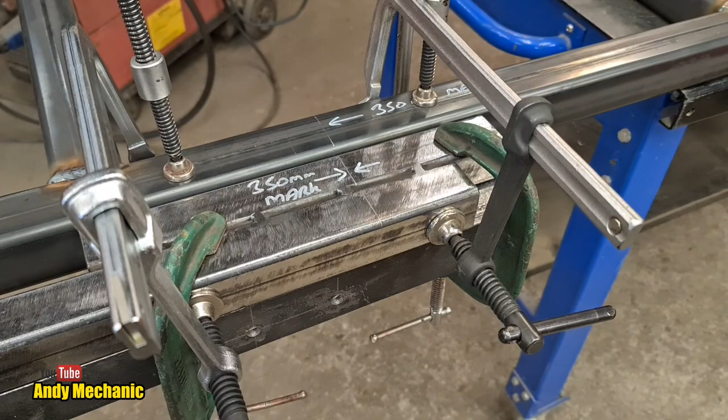These 2 pieces are welded together. We needed a bit of clearance as we come down here - look, you see, we needed a bit of clearance for the foot. So a couple of bits of box section welded together, all clamped up nice and tight.

And that now, and I'm not kidding, making this piece exactly 90 degrees to this piece of box section in 2 planes, that way and that way, was an absolute nightmare. Because obviously when you weld something it distorts with the heat, and every time I welded down here on this one, it pulled that down.

So I had to, in the end, cut a groove in it and put a very thin line of weld down there, and what that did is it pulled the whole thing back up. It wasn't bent for the first few centimeters, and then it seemed to kink downwards a bit. So by putting a weld there, it brought the whole thing up perfectly, and it's nice and straight. I know why it bent - it bent because of the heat. But anyway, not to worry.

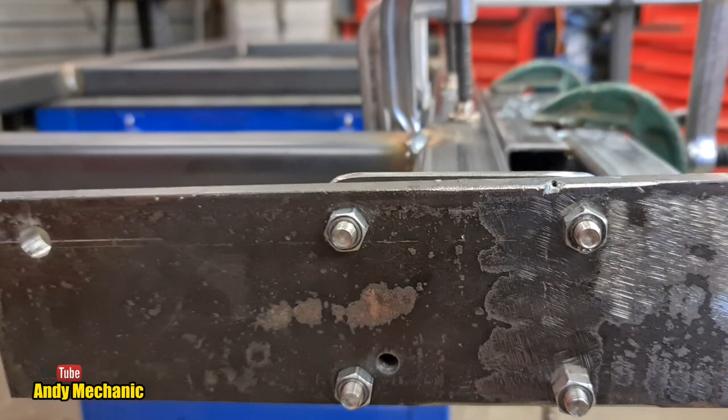Made a slight error in the fact we've got from this side here. You can see actually when you look down the frame, there's 3 different planes that I had to take into account, and one of the planes, the least important, I didn't even bother with. And you can see that this piece of steel here, it should be slightly up.

Now, as it is at the moment, it's all rigged up so I can actually bolt the plate into place using these 4 bolt holes. But when I flip the whole thing over to do that side, of course the bolt holes don't line up, and I have to just clamp the plate into place. It's not a problem, it's just the way it is.

So the plan of attack now is I tack that into place, 2 tacks on each side of the box, 8 tacks altogether - I think I'll just put 1 underneath because I can't see what I'm doing. I can take all this paraphernalia off, and then I can weld it up proper. And once that's done, I can start again on that side, and then I've got 1 more frame to go, which is over here, the left-hand frame of the second workstation.

And then when also that's done, I can crack on and make the bars, put the ends on the bars that join the 2 frames together for each pair. It's pretty cool. Right, so let me crack on with that, and I'll see you back at the bench.

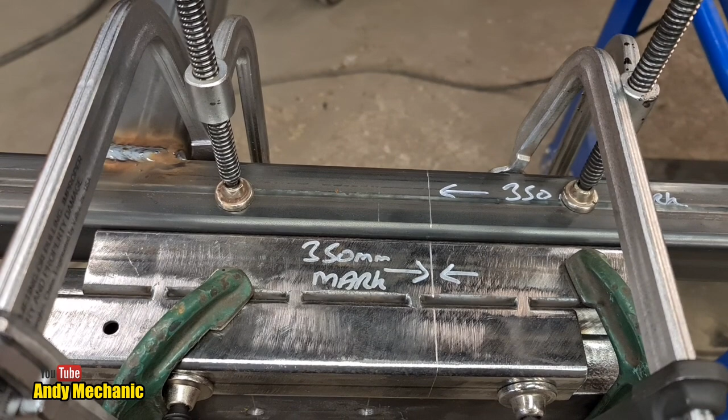Oh, one more thing I forgot to mention. A very important part: obviously the two feet need to be in alignment. You can't have one lower than the other, otherwise it's not going to work, is it?

When this foot was put into place, I measured up 350 millimeters to this line here. Now we've got a mark also on the jig, and using this special tool, my extender square - I know, Heath Robinson, but it does sort of work - that then goes and I line it up there with the line, on that side of the square, and then I've got two pieces of steel clamped into place vertically off that box section, which allows me to score the line on this side here. It has to be as accurate as I can possibly do it.

But you know, I might show you that bit on the next one. We'll see. Right, stick that back over here. Yeah, good old little G-clamps. Good job. It took me quite some time to line all this up, but to be fair it's only a short distance extra, so there's very limited margin for error there.

Now you might ask, why does Andy put some countersunk bolts into the holes? Well, the idea behind that is it stops any welding splatter getting into the countersunk area I've already drilled out, because once they're welded into place I can't re-countersink it. It would be a real ball ache getting the splatter out. I don't mind sacrificing the odd bolt, but it just guarantees we keep all the splatter out of those nice countersinks. So that's why. Right, I'm going to crack on and do the next one.

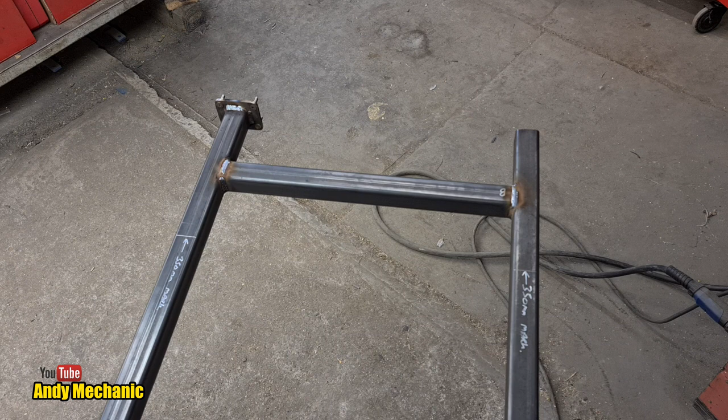Woohoo! Alright, you're going to get a lot of rain sound because it's pouring down outside. So the first part of fitting this jig is a couple of stays that go underneath here, look like this. There we go, that's one. Stick the one about here somewhere. There we go.

And then on that, because the box for the jig is 40 by 40 and this is 50 by 50, we need to raise the whole jig up by about 5mm to get everything central. So 5mm metal on there like that - that just sits on there quite happily. And now we need the jig, so that just sits on there, and we've got to leave enough room for the plates, so we'll stick that on there like that. That'll do, it's about right for now.

And we need a clamp - let's use that one. That clamp goes onto here, right down to this piece that goes across that we first put on, reasonably loosely fit for now, I'm not going to tighten it up too much. And the same for this one - should be about right there, look. There we go, not too tight.

And now we're going to make sure it's parallel onto the actual frame itself in that plane, so we use some more clamps to pull that in, hence why we leave these a bit loose. And now we can tighten these up. And we've got another one over here, just to make, you know, because you're going to have two, obviously.

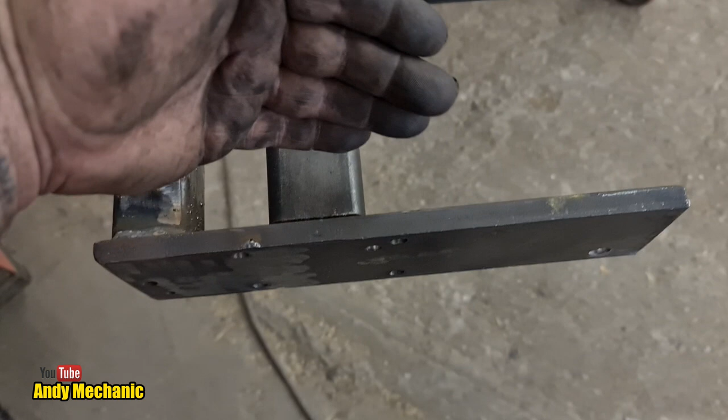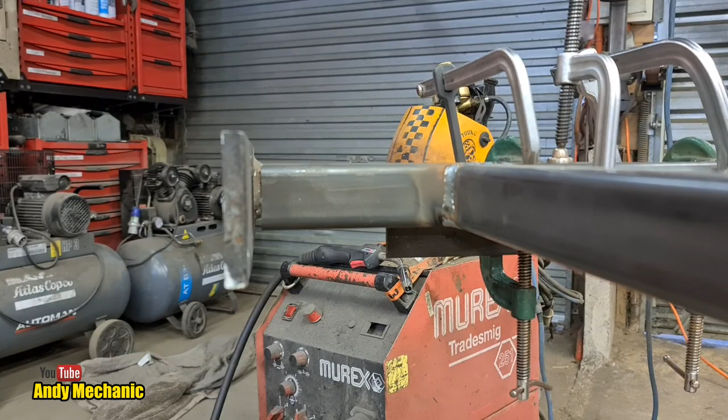And the camera's distorted it, don't worry - it's a nice right angle here on this plane, and of course on that plane as well. Fingers in the camera. Wow, okay, there you go. So it took me a while to get that right, but once I did, I've got it forever now.

It's really useful. Okay, next job is to pick up the piece off the floor. And now, because I can't use the bolt holes since Andy made a mistake, I now have to score in the middle of this a 50 by 50 box, and that's going to help me to line it up with the box section. It's a bit fiddly this side.

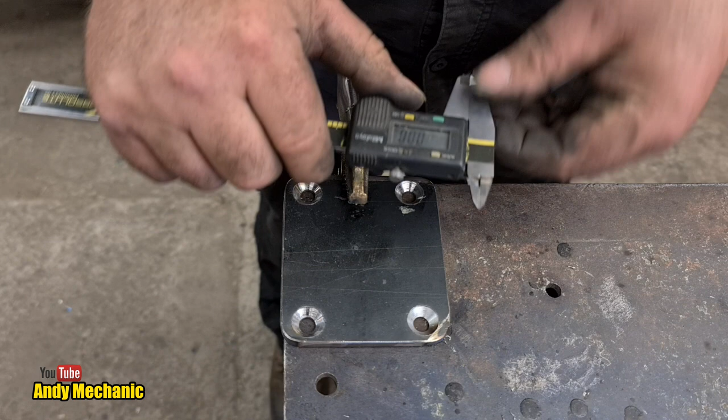Right, said Fred, quick and dirty. So this is 85 across, less 50 is 35. Half of 35 is 17.5, so we'll have a 17.5. I know it's upside down to you guys, but believe me, it's near enough 17.5. Oh, you're going to be pedantic again, aren't you, Andy? Oh jeez, that'll do - 17.49.

Okay, and then we'll just score down - it's only a guide, we'll score that down there. Oh jeez, down there. Now we need 60, so that plus 50 is 67.5.

And I wish I'd taken more care doing that jig now, but it is what it is. It's actually really tricky because of the welds causing the distortion.

Okay, right, we've got to turn this round now. Now, 100 across here, 50, so it's 25 either side, so 25... go on, you can do it. That's near enough. Down there, and 75, so 50 add 25 is 75. A bit too much. That'll do. And then we'll score again. Notice that I've always stuck to the same side for scoring both lines. Very important.

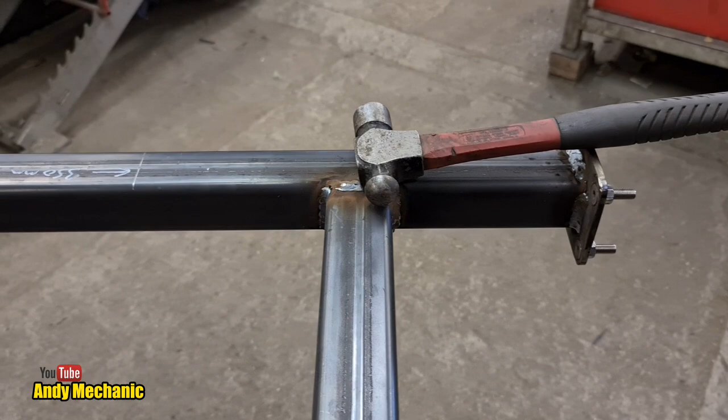However, we have a problem, Houston. Let me show you what the problem is. Okay, now remember that 350mm line, that datum line that we've got that we're sharing from one side to the other in order to get the distance that the feet are on the frame exact.

Well, if we look down here, I've got a square. Hopefully you can see this. If I bring that down - in fact, can I do it that way? I'm just going to take a clamp off. I know I shouldn't, and I wouldn't normally, this is just for you guys, because you need to see this. There we are. Do it properly now.

Okay, so can you see that the lines on the left hand side are a fraction lower, about 1 millimeter I would say, that distance there. Now, am I being pedantic? That's probably, yeah, I would say it's about 1 millimeter actually, maybe just under 1 millimeter. So this plate here is tight. So what has to happen here is I need to just get the grinder with a flat disc and just take a little bit off the bottom of this box section, so that when I refit the jig, the whole thing will move up a fraction and it'll all line up. God damn it.

Right, so Fred, it's all back on, plates sort of wedged in place. Doesn't matter, I don't need to worry about keeping the bottom of this box section square. You can see when I've been grinding it, there's now quite a gap down that bottom corner. Doesn't matter, because as long as this plate's held flat by our jig, the weld will fill up all the little holes and stuff, little gaps. But more importantly, are we lined up? So there is our square. There's no gap, by the way, anywhere down here. It's all nice and tight, so it's parallel, which is the important thing, so we can run off that side.

And if we look down from the top, I would say now Andy's taken a little bit too much off, and we now have the jig a fraction too high on the frame. So what we'll do in this circumstance, we'll line up the foot, we'll clamp the foot with some mole grips - normally it'd be bolted, but clamp it with the mole grips onto this main plate here, which is, by the way, I think about 12mm plate, hell of a hellish stuff. And then we'll just use a hammer and go tappy tap tap on the top end of the jig, and that will bring it down. We can bring it down until we get those lines to line up.

Whew, so close. Let's see where we're at. Hopefully the torch will help you a bit. Right, so it needs to go that way a bit and down a little bit. Right, torch, you stay there. So we'll go that way. Not too bad, down a bit. It's actually quite easy to move this time round.

Now I'm not looking at this, because we know this is wrong. I'm looking at the surface of the box section and lining that up with the line. What I do is put a ruler across here and look at this surface, making sure it's parallel with the ruler as well before we go ahead. I think a bit like that.

Okay, I'm going to put a pair of mole grips down on the bottom just to hold it into place, and then we'll double check it.

One more check before, I think, hopefully Mr. Mole Grip didn't move things around too much. It might be a little bit low. This kind of stuff can be quite fiddly. This is not your Colin Furze channel, you know that.

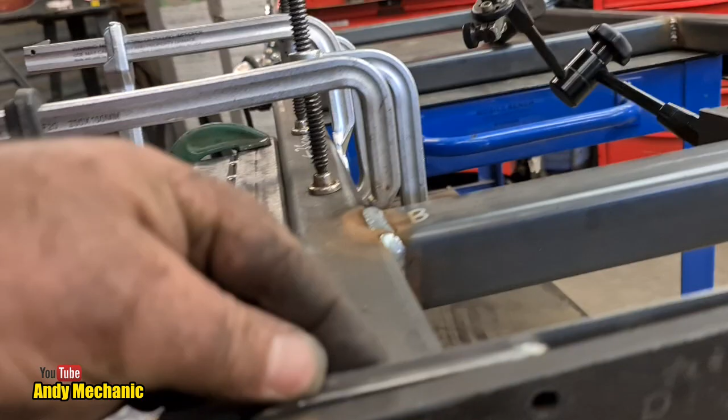Alright, I think we're about there. Let's double check with our ruler, and I'll take you on the journey. Just getting our ruler, I'm going to sit it on top of the box section, bring it down, and what we're looking to check is that the gap across the top here, the ruler is parallel to this surface here, and it looks pretty good. It's maybe a little bit high at this end. Like I say, ignore this surface because it's completely wrong.

I think it wants to come up a fraction at this side. So we'll get Mr. Hammer and we'll tap him into place.

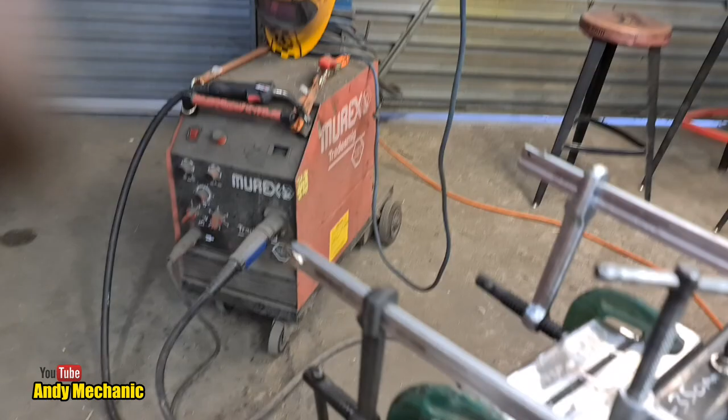Let's see how that looks. Ruler's back in place again. Oh yes, that's better. You can tell when something's parallel. Every time I bring it down too far, it goes out of focus. So there you go, the ruler wasn't square. There you go, it's done. That's it, we can tack that into place now.

Okay, all I have to do now is tack that one up and weld it up. You've already seen that when I did the other side, the first side of this particular frame, so no need to see that anymore. I've got one more frame to do, I'll get that done as well, and I'll see you back at the bench shortly.

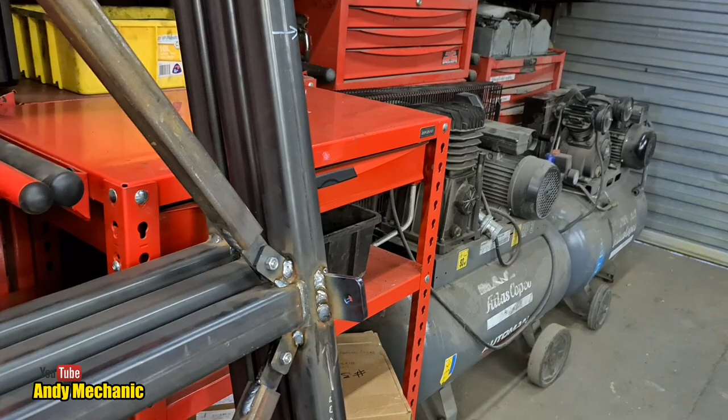Okay, frame number one for the first workstation has now got its side lugs put on. These will mount the cross pieces. There's one down the bottom on the back leg, and then we've got two for the main desk, and then we've got two for the upper shelf.

And the second frame is now on the operating bench again, and I've just done that one. Ignore the welding splatter, Mrs. Mechanic's going to fix all that.

Now, when you're welding these on, it's obviously critical that we get them vertical. We don't want them to veer off to one side, and that makes it very difficult, because when you weld down one side, if you did the whole weld in one run, this plate, as that cools, gets pulled across, which is not good. So I always find I've got to tack it in place, weld a bit on this side, weld a bit on this side, weld a bit on this side.

You got the idea. Weld a bit on this side, work your way down, and that way it keeps the pull even. You've got to be pretty quick doing one side with its adjacent pair on the other side of the plate. But so far I've not had to grind any off and start again, so I'm quite happy with that.

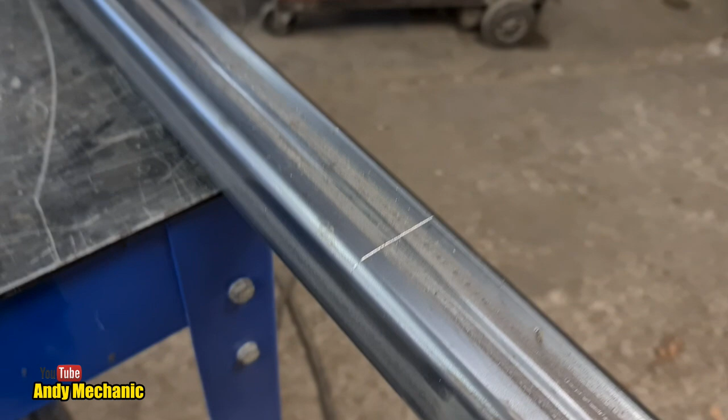Now the next one is this one here. You might say, Andy, how do you know where to mark up? Well, I'll show you. I get a bit of angle in, and it sits on there like that. I normally, if I just put it on there as a demo, a smaller piece would be better, but I'm not prepared to cut it.

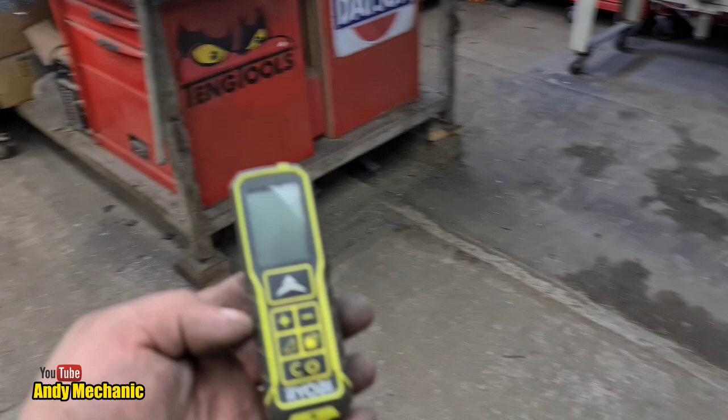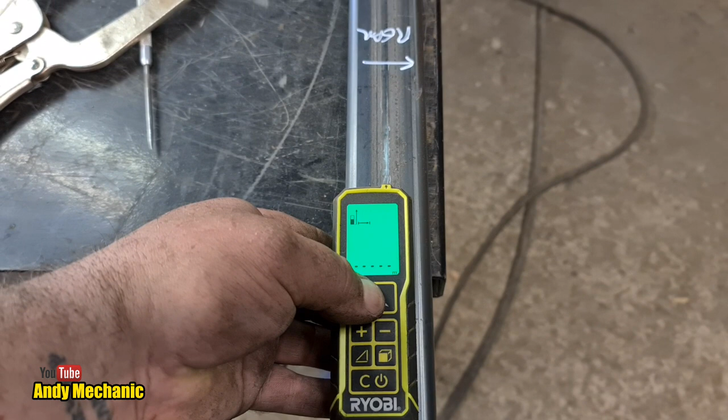I then clamp that into place. Remember this? Down that end, I've clamped into place some kind of plate to extend the rear surface of this foot bracket for the casters. With this one clamped into place, I offer that up, press the button, it turns on, gives us a little red dot down there. I press the button again without wobbling it too much, and it gives me a reading of 1679. It's moved a bit, not quite on the line — that should be 1680, and believe me, that line is 1680 millimeters from that rear surface down there, as was that one. Right, let's turn it off.

Nice. Got to save the batteries — it chomps batteries, this thing.

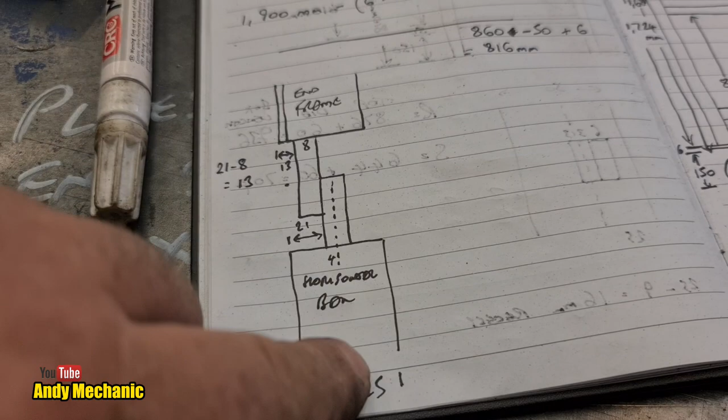Okay, so I made up — well, first let's look at the diagram. So this is the frame, and this is where the plate needs to be positioned relative to the side face of the box section, because the cross piece — those bits over there — I want the plate to sit down the center line of the box section, same as we did on the smaller ones. So I did a quick calculation: it's 50 by 50 box, center line is 25mm across from one side, so you've got a split of 25-25.

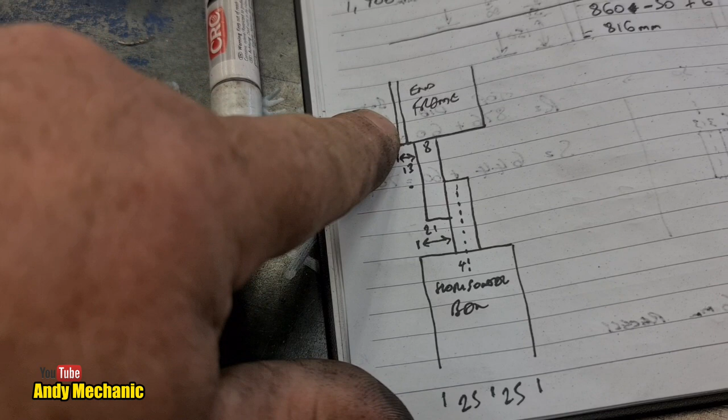These plates are 8mm thick — yes, they're beefy. So 4mm of that is to one side of the center line, and that's the mating surface. That leaves 21mm remaining. We have an 8mm plate, so we deduct 8mm off that, and that gives us 13mm. So this face here — that's the one that's welded to the frames we're doing now — this face here, the outer face, needs to be 13mm inboard of the side of the box section. How are you going to do that, Andy?

Well, we have a tool for a job, right? So if I can stand that up right, there we go. Can you see there's a nut and a washer in there? Just happens to be, guess what, 13mm. That's right. So now I can clamp this surface to the side of the box section. So we go over here — boom, boom, boom. It's pretty cool when you sit down and think about stuff. I know for some people this is really easy, but sometimes I need to be accurate.

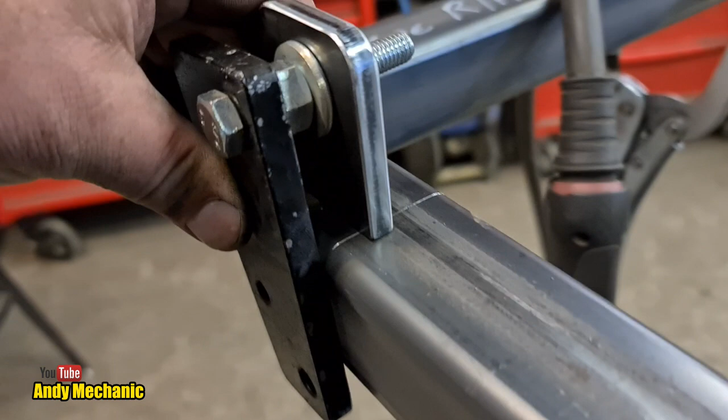So that goes, I clamp that, the black piece gets clamped to the side, and then we can just move it up and down until the front edge of that is in line with the line that we've scored, and check it's all square and everything, and then tack it into place. Pretty good. So I'm going to do this one next, and then I'll see you back at the bench.

Now you're mounted to the frame, so you're going to get a few shakes, but hopefully it'll give you a good view. I'm just lining up this edge here with that line. There will be some slight adjustments once it's in place. Make sure your clamp goes in the middle of the box section. There we go. Now, how we're looking — just tighten up the bolt. There we go. Right, so it needs to go back a fraction. And when you're tapping it — I know you'll probably never do this — but when you're tapping it, tap this bracket, don't hit this, because it might just rotate it around a little bit.

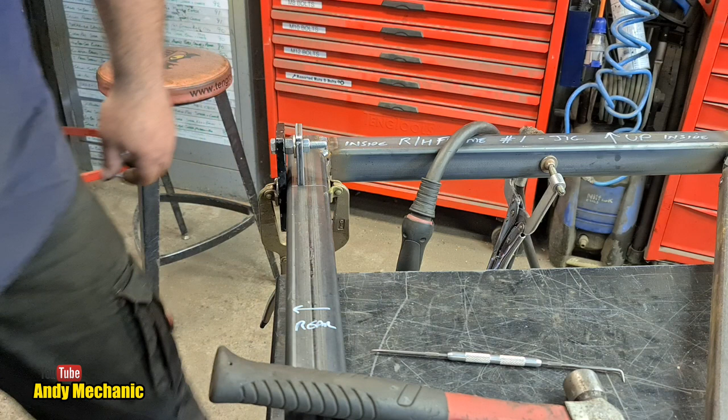And I'm looking down from the top now on that surface, and I want it bang on the line. Okay, that looks pretty good to me. We need a square. Now I could tighten the bolt, but I don't think there's any need to do that. That's good. Double check on this side because there was a bit of — there we go, that's better. And it still lines up with — oh, it's a fraction over.

What size spanner is that? 16 maybe? Probably it is.

There we are. Just give it a little tweak so it maintains position. Right, that's bang on. Quick check with the old square, that'll do me nicely.

So you can see now, because we've got a 13mm spacer here, which happens to be a nut and a washer, we've got the face of the box section, which is this face here. We've got a 13mm indent, and now the outer face of the bracket is exactly 13 mils from the edge of the box section, which is exactly what we need. And it doesn't move. It's all in place, ready to tack up.

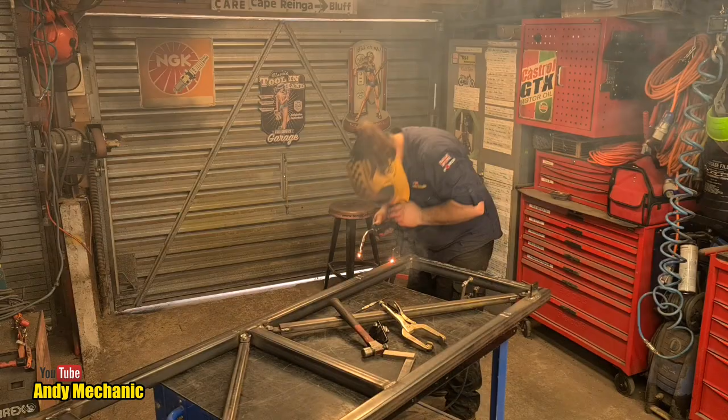Another one bites the dust. Okay, there you go, so it's in. I actually knocked a bit of the splatter off because it was quite embarrassing how much splatter there was today on that one, but she is nice and true. Very happy with that.

You can see I did the weld in 2 stages, and that seems to work okay. I sometimes do 3, but this one turned out to be 2, which is just the way it is.

Now, Mrs. Mechanic will be cleaning up things like this. That's not what Mr. Mechanic does. Mrs. Mechanic does all that, and she's getting a nice workstation out of it, so she's going to be very, very, very happy. Right, that's those 2 lugs done on there.

We've now got 2 more to do here, boom, boom, and another one to do on the rear, which is down on this side of this one, so it all matches that one. 3 more to fit on this frame.

Am I going to do the other frames? No, I'm not. That's going to wait because they're pretty easy to line up, so I won't waste any more time doing the other pair of frames today. I want to crack on and get at least 5, if not all 10, of the crossbars done.

We've got to make a jig so that not these ones because they're a bit longer, but the actual holes - sorry, wrong way around. So imagine the box sections between these, and we've got like a little squiggly line down the middle, it's an engineering drawing. The holes on all 10 bars need to be exactly the same distance apart.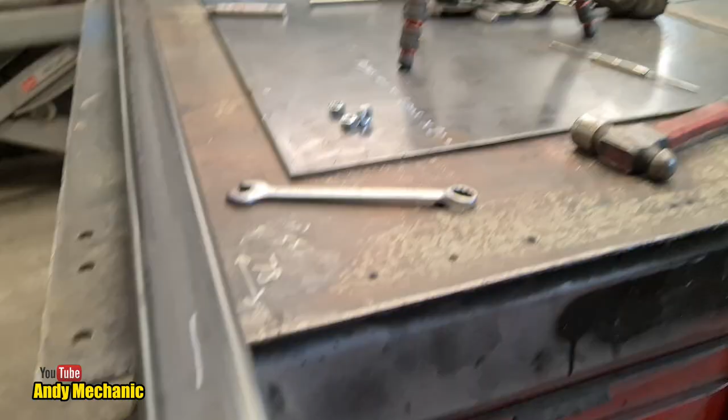So I did a thing. Have a look at this. I've been on the lathe and I've made something. I have made a spacer that is exactly 21mm in length. So now I can clamp anything basically on the outside.

I've just used another one of the brackets. I've already cut the slot, drilled a hole, like we did with the small stuff, and I've made sure that this one is parallel to the box section by putting a flat edge against the side of the box section across here, and it's absolutely bang on both sides.

So now it's suspended in the middle, parallel to the box section, and I can now tack that into place and then weld it up, and I can do the same thing at the other end.

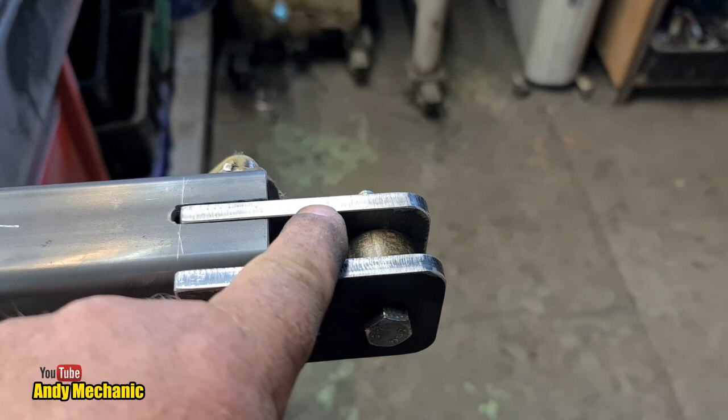This will be the template, and then from this, with this one piece of box section I've left for making the adventure trailer - it's long enough, in fact a bit too long but it'll be alright - we will drill a couple of holes, put bolts through, and then the holes will be drilled through these, so that every one I make from now on will be exactly the same, because all these pieces will be lined up on that one piece of box section.

I could use one of the pieces, one of the cross pieces - there's 9 more over there. This is one of them, part D for reference, because they are a bit too long. I just ordered 2.4 meters, but that's the overall length of the desk, and I did cut it off in 2 separate pieces.

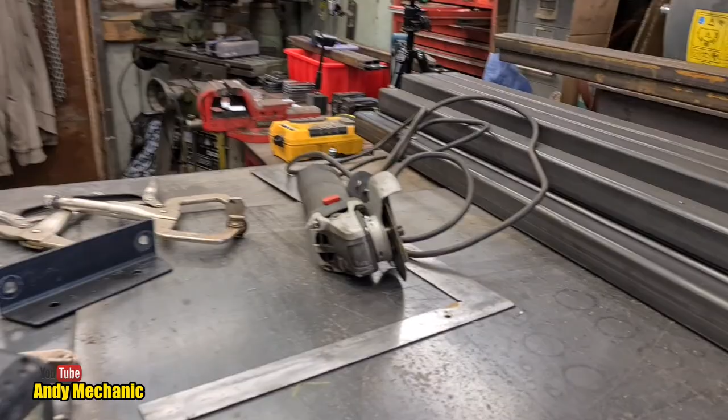I made a miscalculation - that much has to come off each of those lengths. Just to give you an idea, we'll go and look at the drawing in a second. Oh, it's not long enough. Hang on, where's the other ruler? There we are. So I had to cut off 260mm.

So I'm going to have lots of pieces of box section to use for other projects. Woohoo, that's a win in my book. Although it does involve me having to cut more metal now.

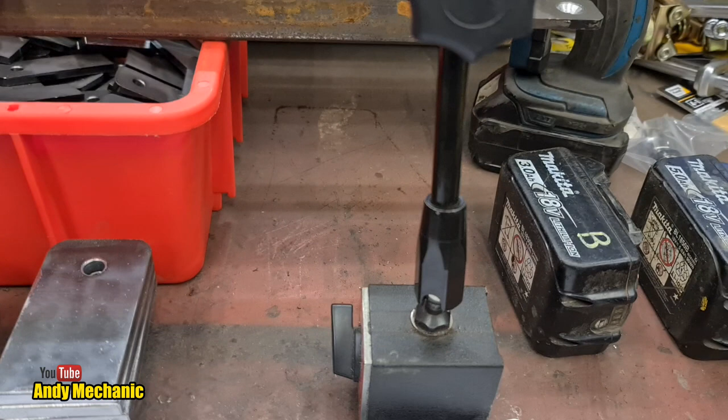And this is just me working out how much of the plate, the long one, goes inside the box section. I've kept it at 30mm, the same as the 30 by 30 box ones that we made, which are those ones there actually. Perfect. And these are my calculations.

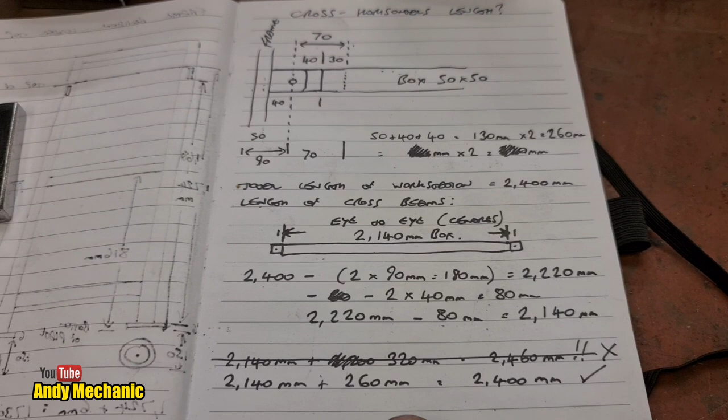So the overall length of the box section has to be 2140mm, not 2400. So yes, 260mm to come off. First calculation incorrect, second calculation correct.

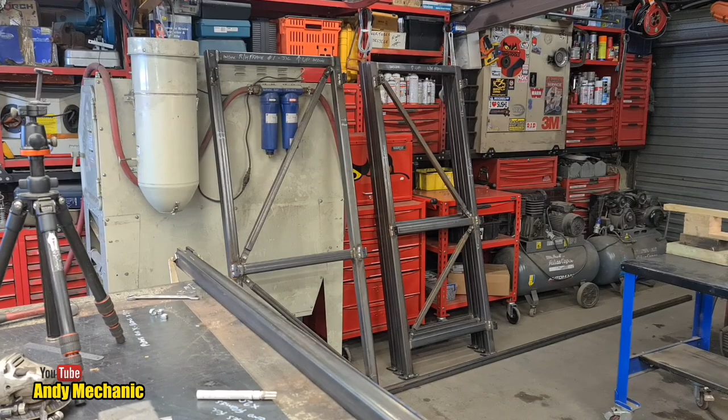Honestly, it's getting late in the day. So I'm going to crack on, get these tacked in and welded in on the template first cross brace, and then it shouldn't be too long before I can knock up at least 4 more today, and we can get these 2 frames bolted together. I can't wait, to be honest. This is like day 4 doing this job. It's going on forever.

Now, critical point, we need to make sure that the gap between the holes is bang on with this one, this being the template. So, need another bracket.

Okay, so everything's lined up, other than the fact we don't know if the 2 holes are exactly the right distance apart, because those end plates can move in and out a little bit - it's not an exact science. So I need to put a plan together on how I'm going to measure accurately between the 2 holes. I need to have a think.

Well, I've come up with another cunning plan - today is the day of many cunning plans. Take a look at this. We know that the distance from the center of the hole to the back edge of this plate is 70 millimeters, and it was laser cut, so it has to be right? Then we offer up some box section with a 3.1 millimeter wall thickness - remember that, it's very important. We'll make sure she's square - she is - and then we'll go down to the other end of the box section.

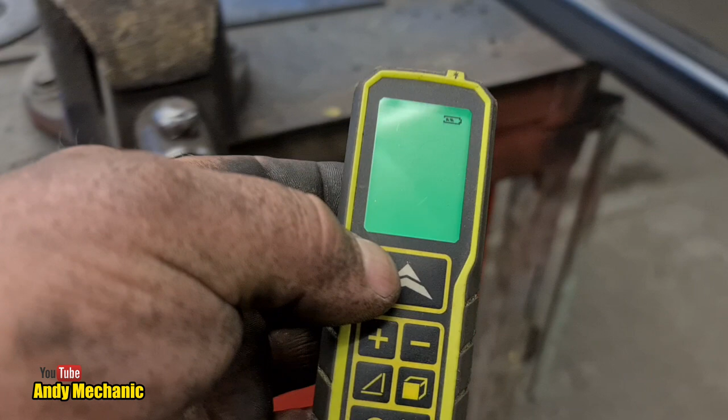Ah yes, this will be useful. Right, let's turn that on, we'll stick it on there and get the little dot lined up at the far end. We'll do best of 3. Okay, what have we got? All the same - I like them when they're all the same. 2071, so we need to increase it.

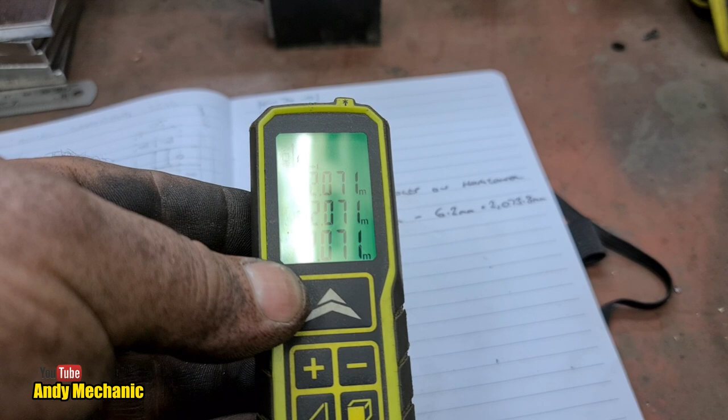By 2 to 3 millimeters - it doesn't give me it, I could have done with 1 more decimal place. So we'll aim for 2074 as nearest, right, because we're at 2073.8, so that'll work. I need 3 more millimeters between these 2 points. That one's already welded in, so I just need to move that one out by 3 millimeters, and then we can measure it again. Okay, leave it with me.

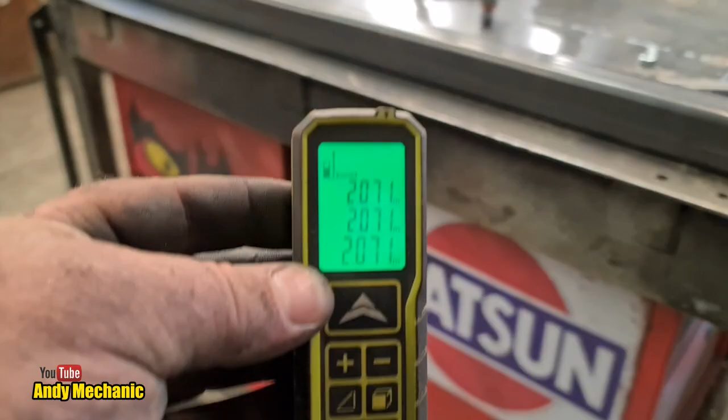Back in a second. Right, we'll just score that for now. There we go, you're actually on the beam. We'll remove the clamp. And you're in the way - hang on, I'm just going to move you back a little bit. That should be enough to get my ruler in. Yes, just. Okay, so now I'm going to move it 3 millimeters.

That does seem to be about 3 millimeters. So we'll get the clamp, stick it on. Okay, about 3mm, there we go. Now I've got to make sure everything's lined up again. I'll bring you up a little bit so you can get a better view. I'm just going to lock the focus because we're professionals, not.

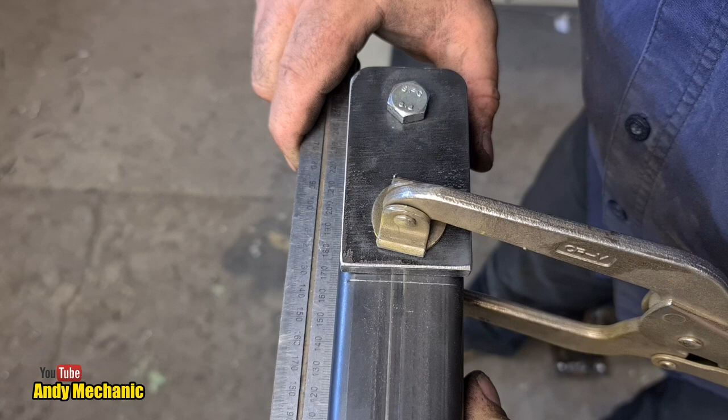Okay, so we've got to line everything up before we can take a measurement. This is the thing - we're way out, so I'll just bring him out. There we go, and he needs tapping. Oh, he's way in, hang on. You're not going to like this. Wasn't too bad, was it? Wasn't too bad.

Have a look in this side - we're pretty good actually. I know you can't see everything. Maybe one little tap that way. Of course it pivots on the thingy, doesn't it? There we go, that's better. And of course that's good. Right, so we'll replace that and we'll take a measurement.

Okay, let's see how we get on - 2074 is the magic number. Power is on, make sure this is all aligned properly. Stick it on the back there, press the fire button. Best of 3. Woohoo, look at that, perfect! Right, so we'll get that welded up.

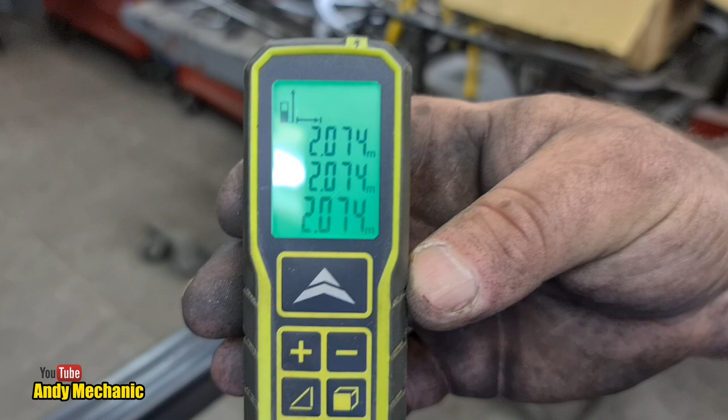Going to be hot, hot. Oh man, could have got another right size spanner, couldn't you, Andy? It's all right, it works.

You can't feel it being hot. It can't be hot, right? Ooh. Okay, stick him on there. Is it going to work? Yes it is, stick him on there, our spacer.

Okay, first one of 10 is now made. So now I need to make the jig, which will mean we don't have to keep measuring every time. It'll just standardize the whole thing. And then I can crack on and get them all done.

Holy crap, it's gone 7 PM. I'm going to be in so much trouble shortly. Anyway, I'll show you how far I've got. I'm not going to get them all made today - we'll just carry on with this video next time I'm in the workshop. But this is what I've been up to. Okie dokie, workshop's a tip.

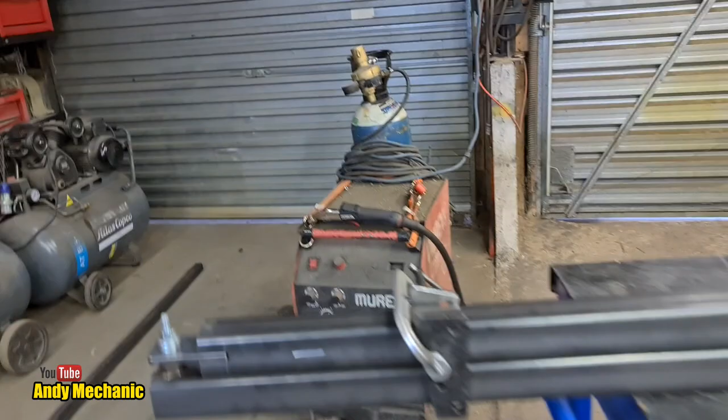I've been on the lathe again, look. So I decided not to use the small 40x40 box because by using 50x50 I can just put clamps either side to align everything really easily. So I decided not to drill any holes either - I just welded a couple of bolts in the right place from the template and then made a couple of new spacers. There we are, thank you Fern.

14.3mm wide because the bolt head is 6.7. That's right, and it all adds up to 21. So there's a 21mm gap between the surface of this box section and the underside of this plate, which means that everything lines up perfectly.

This one is all ready for tacking together and welding up, and that'll be the first one made off the jig. Now you might say, hey Andy, this is great, but what happens when you get to number 10? Well, number 10 I'm just going to have to make in the traditional way, or use one that I've already made and flip it over the other way and use that as a jig, and just make up a couple of new spacers or use washers or something.

But I thought that was quite a smart idea. Seemed to work pretty well. Didn't have to drill any holes either. So I'm going to crack on.

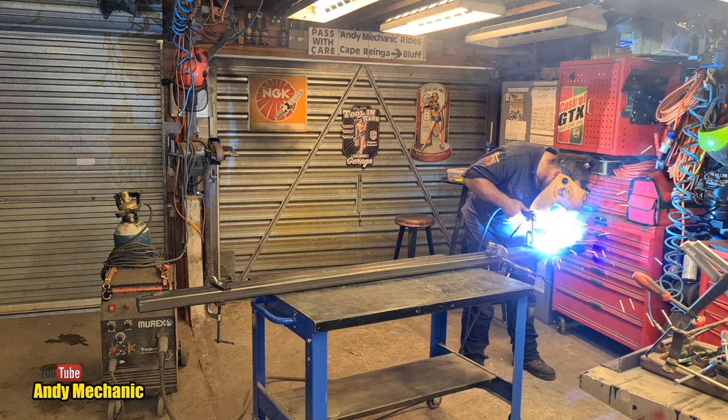So another day comes to an end. I've run out of time. Things have gone pretty well, but slow - a lot slower than I originally planned for this project. But anyway, it is what it is. I have another week of work ahead of me for my day job.

Back in the workshop again on Saturday. So, what have we achieved today? Sort of the second part of this video. Well, we've fitted the lugs onto the frames - that's basically all we've done, and we've made 2 bars. I need to make 3 more before I can assemble one of the frames, which will be Workstation One. So Saturday morning I will crack on and get the other 3 bars made for Workstation One, and then I'll check in with you. Until then, enjoy your week, and I'll see you in a few seconds, hopefully.

I'm back, and it's not the following weekend, it's the weekend after. 2 weeks have passed since I last filmed on this project, and that's because I've had a serious problem. Now, I made up all 10 of the cross beams last Saturday. Thought, great, we'll get them all made up, we've got the jig, we'll get it all done. I had a problem. And the problem was that the inserts, the flat plates that I was welding in the end of the bars, were not 100% aligned with the tabs on the end frames. And through further investigation, I found that we're looking at about a 1 degree twist on those plates.

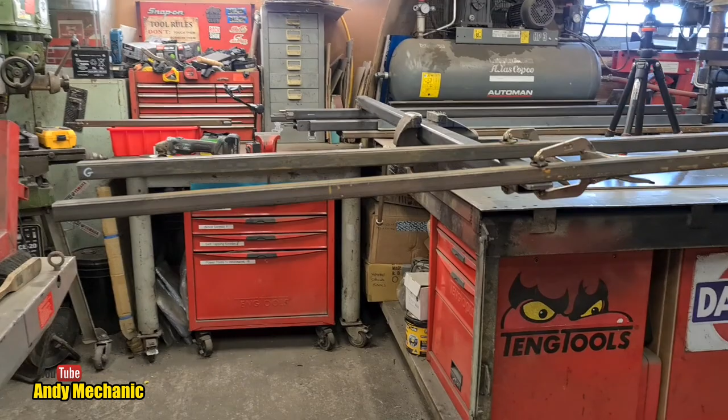So if I just come back, and we'll just move the trolley out of the way, there we go - if you look, you can see there's quite a discrepancy in angle. So that tab there is not in full alignment with the box section itself, it's slightly off, and that's the problem. So we grab the digital...

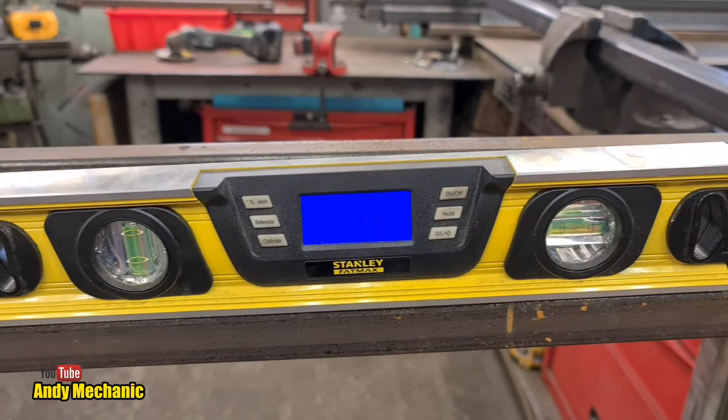...spirit level, which is super useful for this kind of thing, and it is really obvious it's out. But if we want to quantify it, that one there runs at 1.8 degrees, which is fine, it's just the way it's mounted in the vise. But if we stick it on this one here, you can see that's at 3.7. So the difference, 1.8 to 3.6, is 1.8 degrees out. You can see that on there, look. Probably not the best on the camera, but anyway, so it's 1.6, sorry, what was it? Have a look.

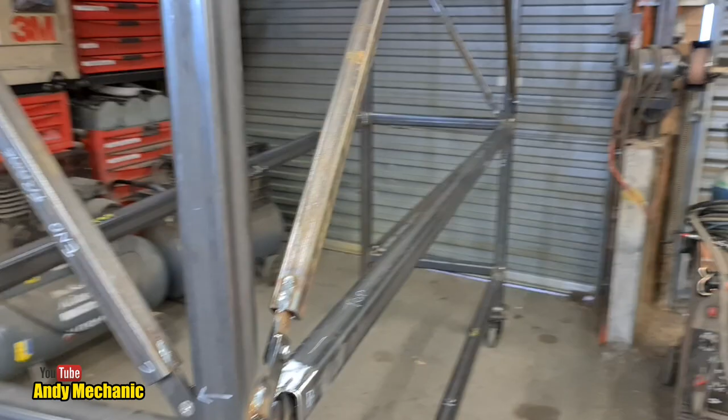1.7 on the rear, deduct 1.7 from 3.7, it's 2 degrees out. Wow, that's a lot. And when you look over the whole distance of the frame, what it was doing when it was being bolted up is it was lifting that rear wheel off the ground, that left-hand wheel, and this wheel here was losing some of its weight. Essentially twisting the whole frame, which isn't ideal.

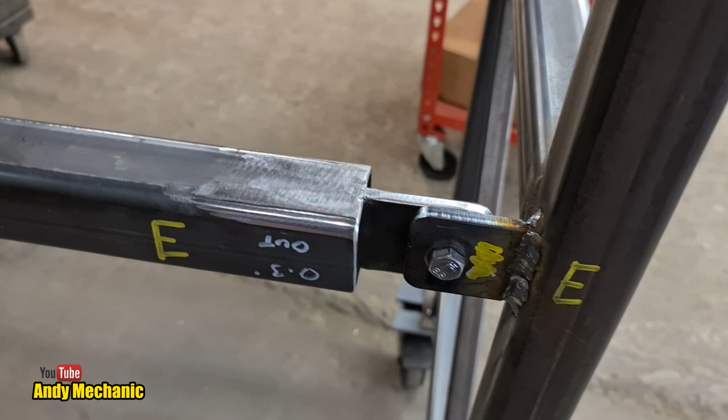So to fix that, I had to cut every single tab out. I did one at a time, bolted it to the lug on the frame, supported it, got it all lined up, tacked it into place, and then welded it up on the bench. Rechecked it, and it was perfect. They're all good to go.

What I also like, I'm not one for grinding welds, but we've got a bench top to sit on here. It's not going to sit on top of these beams anymore. I've decided it's going to fit inside, so the top of the worktop will be flush with the actual box section itself. It should be quite nice, actually, I think.

So this will be the edge of the bench. We'll have steel as the edge rather than wood, which would have to be dressed up and stuff. So it reinforces the fact it's more of a steel workbench than a wooden workbench, so to speak. Plus there's no chance of splinters and that kind of thing.

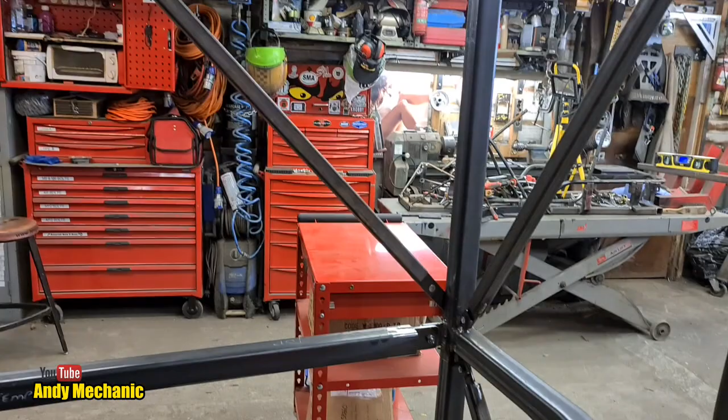I also added the diagonals up there, look, and I used the same lengths as we've used on this piece here. So I stole those off of Workstation 2 just to speed the job up. And if we come around this side here, that's how I did the tabs.

There's another reason for some slight design modifications here compared to the original drawing - it's got some temporary casters on at the moment just to wheel it around the workshop. Obviously we've got this overhang here, so when it's in the office it won't be able to go any further towards the wall than when it hits here. So there's a gap, about 25mm, 30mm, here. So I decided to have that box section sat just back a little bit.

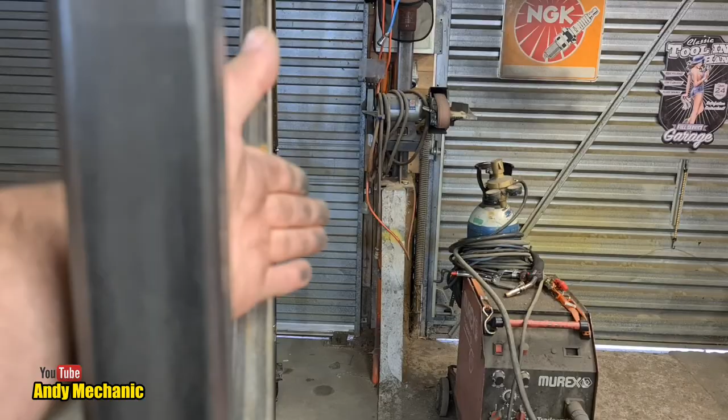So then, for Mrs. Mechanic, she wants a pin board all the way across here. And what she doesn't want, which is good, it's a bit of time saving, is shelves coming down from about here to here. She doesn't want any shelves. She wants a completely open worktop, which is great. That saves a bit of steel and a lot of time.

Right, back to the bench. So, as you can tell, my entire weekend last weekend just flipped completely to stopping building and fixing problems that I'd created. I just didn't appreciate how such a small angle could make such a big difference on a frame when you're trying to get it square. And it's mainly down to the fact that the frame is 2.4 meters long, so that angle has more of an effect.

Anyway, it's fixed now. The next step is to put some cross beams across to support the timber that we're going to use for the desk itself. And of course we've got a shelf up the top as well, so we need some smaller pieces of box to go across for that timber to sit on, and a few lugs so we can bolt it down as well. I'll use the same small tabs to create those lugs because we've got plenty of them and they're already made, so it's dead easy.

I'm going to use countersink bolts, with the countersunk head on the timber side, so I don't need to countersink the tabs, which is good because Sheldon the mill's poorly at the moment. He needs a new motor - the brushes are burnt out, so we're struggling a little bit, running on about 50%.

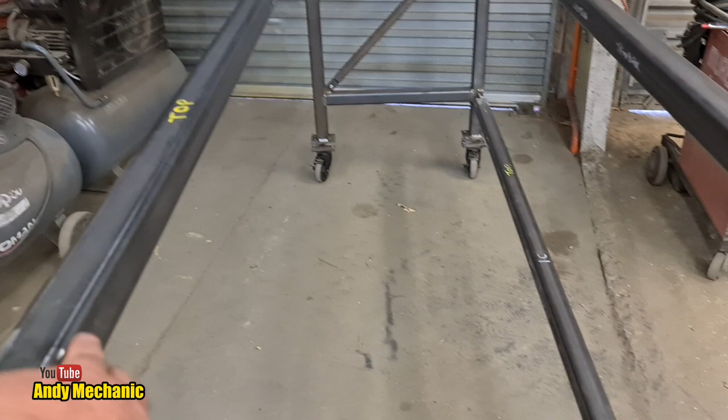The distance from the inside edge of this box section to this box section here is 600mm, and the distance from the inside of the end frame box section to the other end frame box section is 2,300 millimeters. Yes, it's been a long day already.

So I'm going to get them to cut that timber down to 2.3 meters. Maybe I'll allow 5 mil less, just to give us slight clearance so it drops straight in, so I don't have to recut the timber when I come home. Having a tiny gap won't be a problem, to be fair. And they're standard 600 mil wide, so it should just slot straight in between these two rails.

So the next job is to put some cross pieces from one side to the other. I think 3 will be fine. I'm tempted to do it the same way as these, with the tabs that we've done for the diagonals and stuff up there - it's very dark in this workshop at the moment. Or I could just weld them straight in, but that wouldn't be in line with the design. Everything's box section that's bolted into place, so I'm going to stick along those lines rather than just cheat. I want to stick to the brief. But for now, it's looking pretty good.

I'll also need to make 3 more of those for the top, but I've not decided yet how thick the timber is we're going to use. Again, we're going to have the timber flush with the top of the box section. That cuts down the amount of timber we need, and makes a much nicer finish rather than having timber sat on top of the box section. It's much easier putting boxes up and stuff where you've got this nice radius on the box section - no chance of it catching the wood and splintering.

Okay, well, that sort of brings you all up to speed. So, still lots of work ahead, but I reckon, fingers crossed, we'll get this frame finished today. So Mrs. Mechanic can clean it all up next weekend, and I'll have the other one finished for next Sunday, and we can get them all sprayed up.

The paint I'm going to be using is extremely expensive stuff, and it's designed for coffins, for the metal fixtures on coffins, believe it or not, caskets, which is really weird. But when I ordered the paint, they didn't tell me there's an adhesive additive you can put in to help it bond to clean steel. They didn't order that for me, so they've had to order it, and it's still on back order. Fingers crossed it'll be here for next weekend.